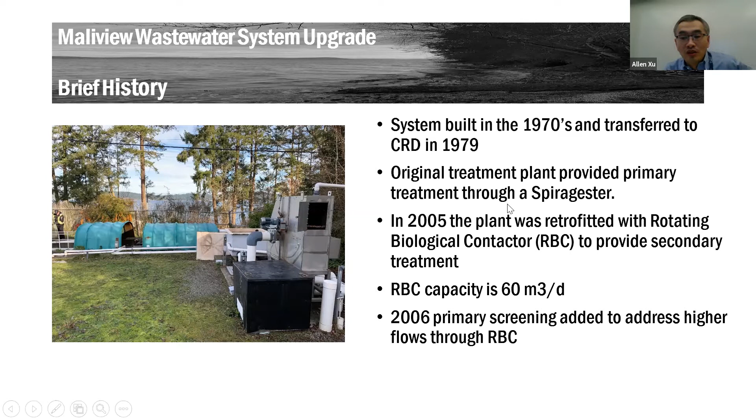So why are we looking at an upgrade for this Maliview wastewater treatment plant? Essentially, we've conducted some study, and it was found that most of the wastewater treatment plant equipment is at or near the end of its life. And there's a few things that we never actually implemented. There's no backup power at this plant, and there's no automated alarm communication system for the plant at the moment. The plant was found to be lacking nitrification capability, and overall it has created difficulty and challenges for us to meet the Municipal Wastewater Regulation as well as Federal Fisheries Act requirements.

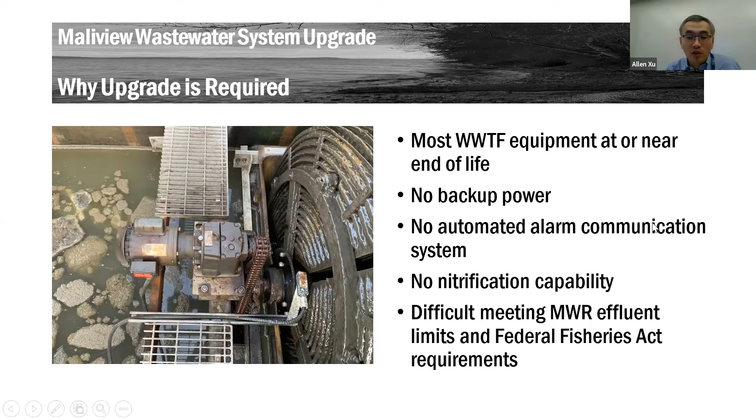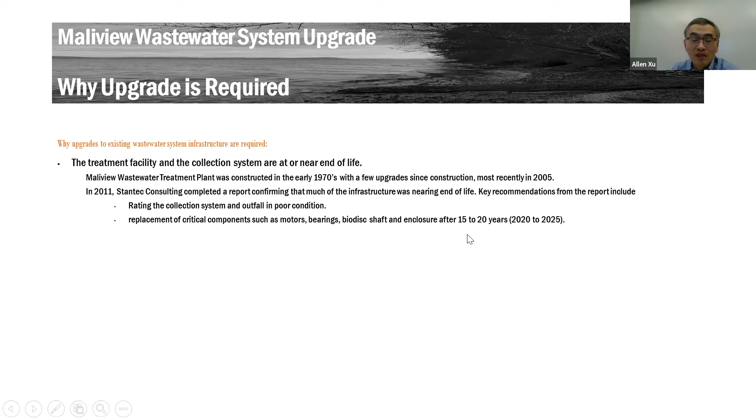So as I alluded to in the previous slide, in 2011, Stantec Consulting completed a report which rated the collection system and outfall in poor condition, and they recommended that critical components such as motors, bearings, biodisc shaft, and the enclosure be replaced after 15 to 20 years. That'll put the replacement starting from 2020 to about 2025.

So here's just an example of what we encountered in terms of operational challenges because of lack of backup power. Last December, there was a snowstorm and the power was out at this plant. Unfortunately, the pump isn't going to be functional without electricity, so the sewage was not able to be treated during the power outage. CRD did respond to this fairly quickly and addressed it within hours. However, we did have to file an environmental incident report as a result.

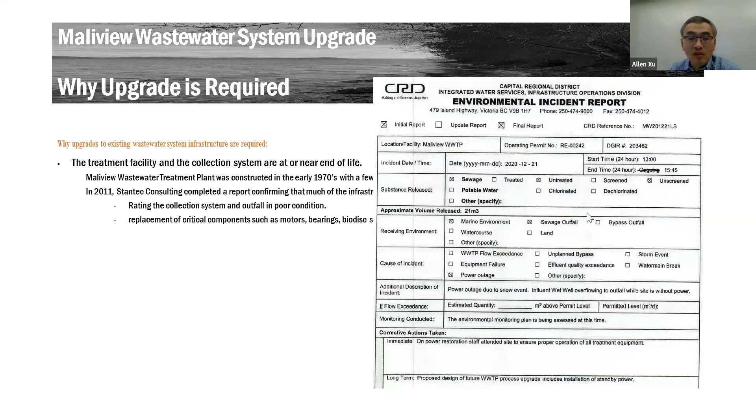So another example to give you is, last September we had to replace the failed gear drive for the RBC unit. We identified the problem at 7:05, and the unit was replaced that same afternoon. But because of the failure of that critical mechanical equipment, a small amount of treated sewage was released to the ocean, and we did have to file another incident report.

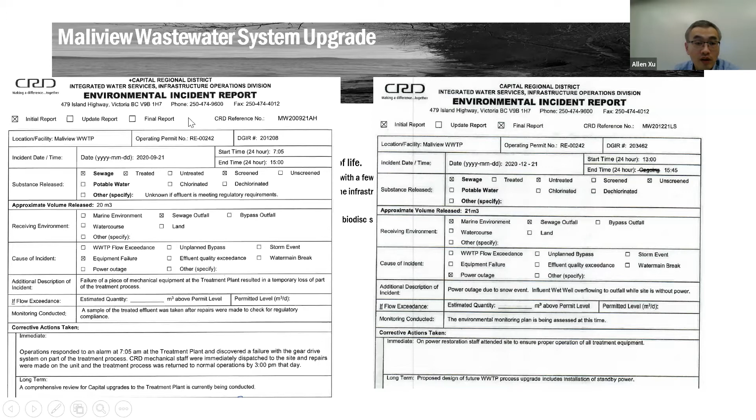So here's just a similar example where, within about a month of the last power outage, two additional power outages occurred, this time due to a windstorm event, and the pump was not functional, and as a result, a small amount of sewage was released, and we had to file another report.

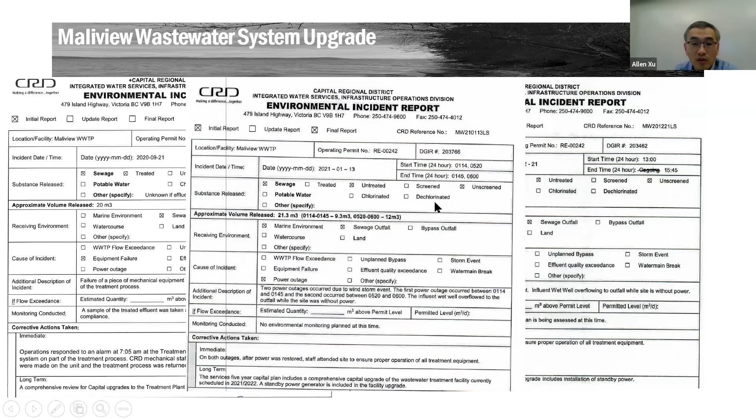Back in about 2018, CRD commissioned a contractor who pushed some CCTV cameras down the collection pipe. It identified numerous tree intrusions and gushers. As you can see from the right-hand side photo, there's a hole and the groundwater is filling into the pipe, and the left photo gives you an example of where, at the joint of the pipe, there's a significant tree roots intrusion into the pipe.

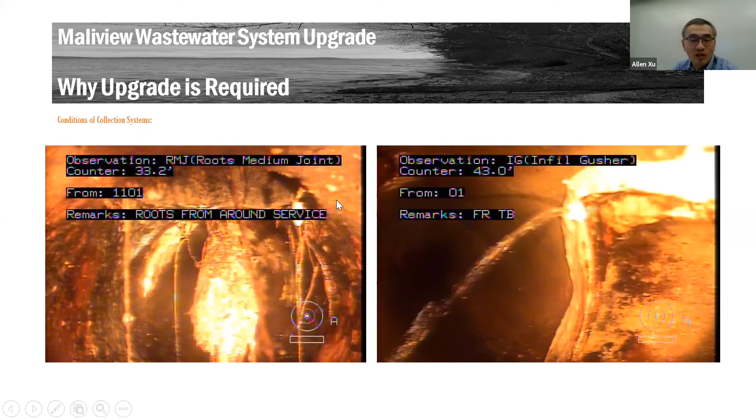I do have to say, this particular upgrading project is not focusing on the collection system repair. The primary purpose for this upgrade is solely upgrading the wastewater treatment plant itself. I'll talk a bit later, when we discuss the cost estimate, about what the scope of that project is.

So besides the aging and failing infrastructure, we had difficulties meeting both provincial and federal regulatory requirements. We had low flows occurring during drier months, which leads to concentrated influent and excessive loads to the wastewater treatment plant, and as a result, relatively poor performance. And during winter months, where the high flow occurs, we occasionally have excessive flows exceeding the provincial requirements prescribed to us in the permit.

The Fisheries Act prohibits deposition of deleterious materials in water frequented by fish. During a recent inspection, sampling and testing showed that the effluent from the Maliview wastewater treatment plant failed the toxicity testing. It was found that the concentration is almost 150% higher than the allowed thresholds.

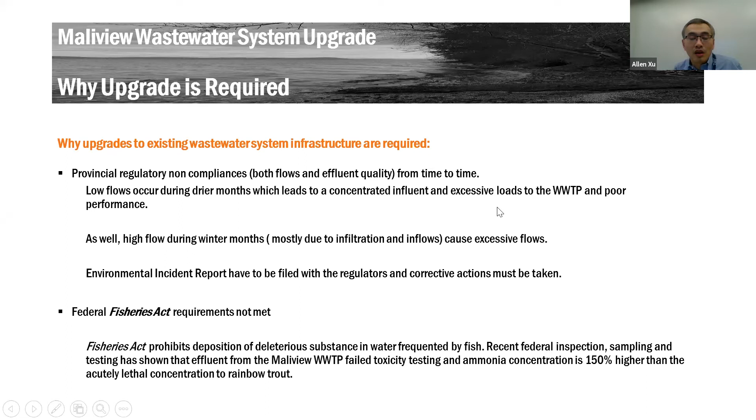So here's a flow diagram that shows you what the current facility and process look like. Essentially you have the sewage being collected through the collection system, which goes through the receiving box. Previously there was a grinder; now it has been removed. Then the sewage goes through the wet well, then is pumped through a 2 millimeter roto screen. Some of it generates waste, which is hauled to a different place. Then the liquid stream goes through a settling chamber, further down to a splitter box.

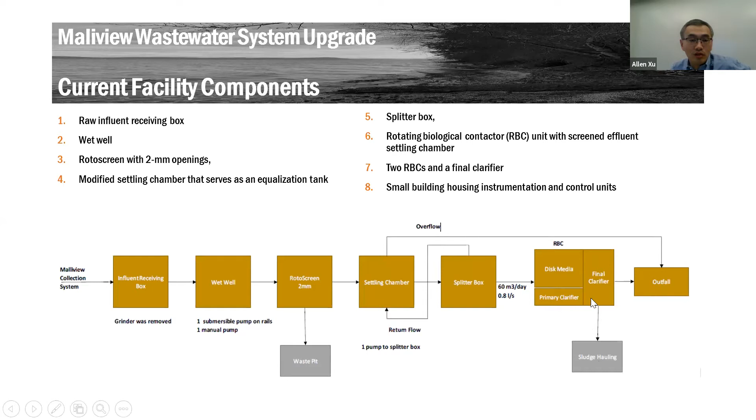Flows that are below 60 cubic meters a day get fed into the RBC unit for further secondary biological treatment. The treated effluent meeting regulatory requirements is released to the outfall and then to the ocean. The process does generate some sludge, which is hauled offsite. For Salt Spring Island, it's going to be Burgoyne.

Here are a few photos to give you a bit of a picture of what the current plant looks like. The first one is the storage building, where the instrumentation and some operational equipment are stored. The top right one shows you that green enclosure is where the RBC unit is housed. That's the RBC unit, and here is the splitter box and the screen.

The third picture shows you what it looks like inside the RBC unit. This is the RBC disc, where you can see some biological film has accumulated, and that's how the biological process happens and the wastewater gets treated. And the last picture shows you what the existing clarifier looks like.

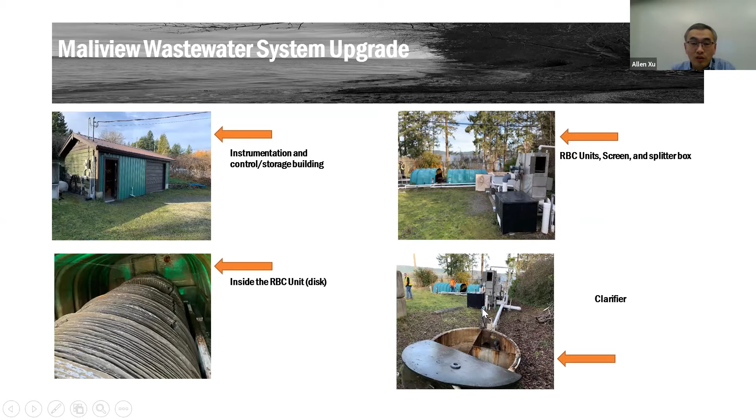The Maliview wastewater treatment plant is primarily registered under the provincial regulation, the Municipal Wastewater Regulation. It requires the wastewater treatment plant to treat the wastewater to meet total suspended solids, biochemical oxygen demand, as well as pH parameters prescribed by the regulation. It also requires us not to discharge toxic effluent to the receiving environment.

Because of the small plant discharge, which is smaller than 100 cubic meters, this wastewater treatment plant is exempted from the federal Wastewater Systems Effluent Regulations. However, the Fisheries Act still applies, which requires that the discharge to fish-bearing waters cannot be toxic.

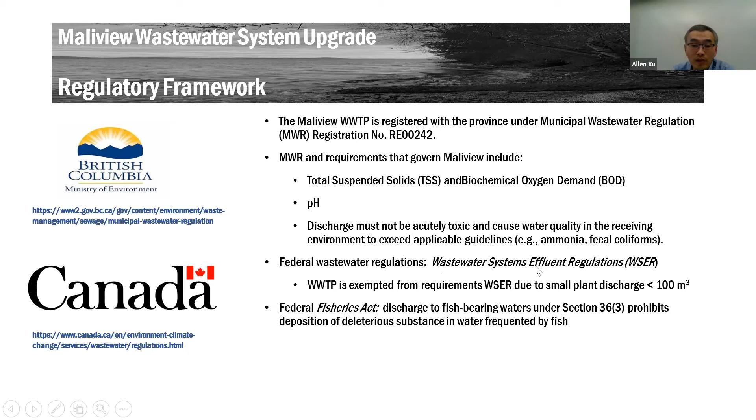So how have we been doing in the last few years in terms of the treated effluent as well as toxicity? We have collected and analyzed the data from 2016 to 2019. This graph shows you the red line, which delineates the threshold the regulation requires us to meet; above it is not meeting the requirements. As you can see, the average and maximum combined flows from time to time exceed that requirement, mostly during winter time, when there's significant precipitation and significant infiltration and inflow into the collection system.

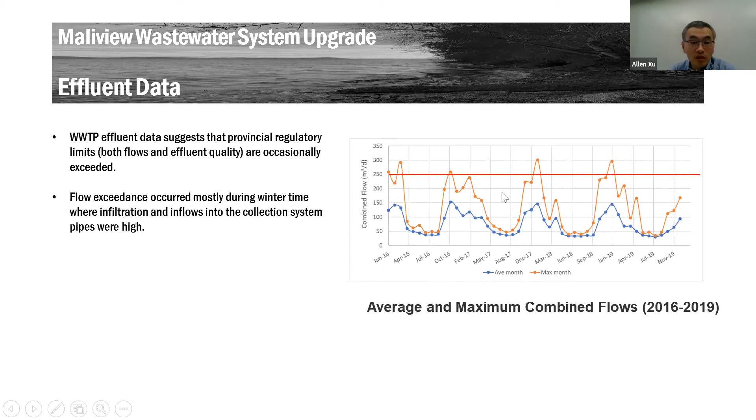Here's the data in a graph for the effluent CBOD and TSS concentration. The yellow line delineates the threshold that the regulation requires us to meet, which is 45 milligrams per liter. Again, from time to time, mostly during drier months where the organic loadings are high, the plant has difficulty meeting the effluent quality requirements in terms of CBOD and TSS.

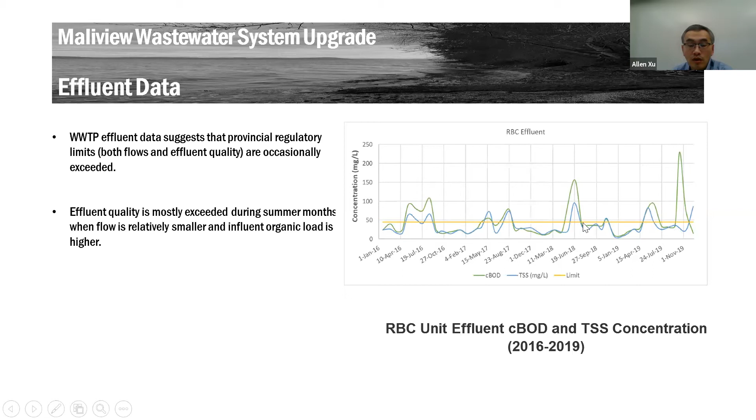In terms of the toxicity of the effluent, unfortunately, from time to time it can reach a significantly higher level than what's desired by the regulation. One time when it was tested, it was significantly higher, almost 3 times what the regulation dictates. To minimize the potential for acute toxicity, the wastewater treatment plant upgrade is therefore urgently required so that we can bring the wastewater treatment plant back into compliance.

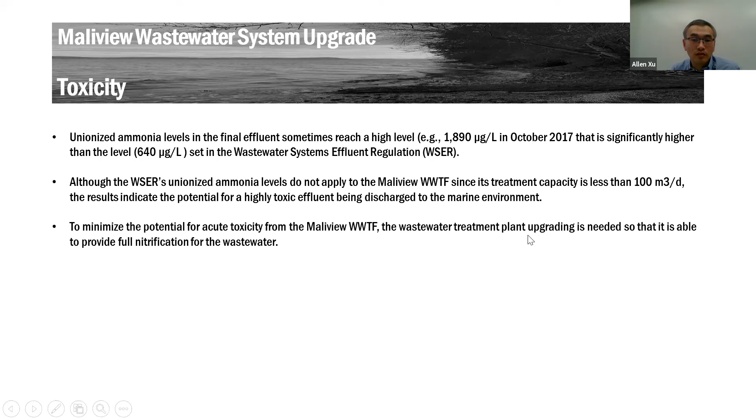So the regulator has been monitoring the performance of this plant on a regular basis. They conduct site visits on a regular basis. In August of 2019, Environment Canada inspected this particular site. They collected effluent samples for toxicity testing. And again, unfortunately, the sample failed both testing, and the result was almost 1.5 times greater than the allowed concentration.

So a month after, Environment Canada issued us a warning letter. They have classified this as the wastewater treatment plant contravening subsection 36(3) of the Fisheries Act, and they require the CRD to take all necessary corrective actions to ensure compliance. They have also warned us, if we don't take further actions timely, they may consider imposing financial penalties, orders, injunctions, or the highest level might be a prosecution.

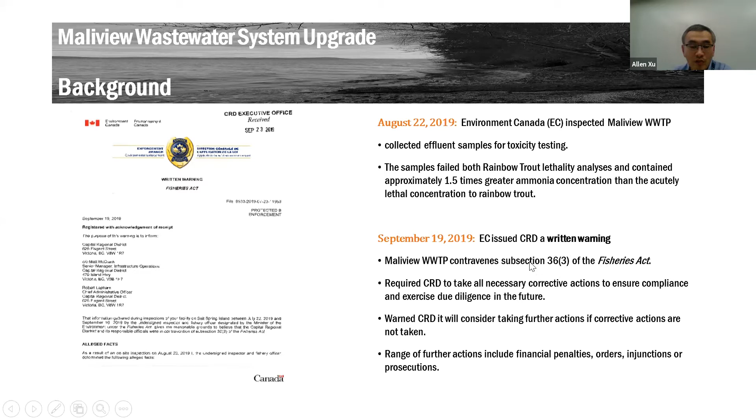The CRD takes those kinds of non-compliance very seriously. We have assembled a team, and we have provided a written response back to Environment Canada. In that letter, we outlined 3 phases of corrective action with a concrete plan to enhance the facility and bring the facility back to regulatory compliance. So we had 3 phases of action plans.

The short-term plan was to implement operational optimizations. Things like increasing sludge hauling frequency do have a bit of positive impact on the effluent quality. That, along with other operational optimizations, has been fairly promptly implemented during 2019 and early 2020. And the medium-term action plan involves conducting an engineering study and carrying out a conceptual preliminary design for the upgrading of the wastewater treatment plant. We have just completed that plan, and we're going to talk about it later in the future slides.

And the final phase, which is aiming at the longer term, is we are committed to the regulator to implement the actual construction of the wastewater treatment plant by the end of 2022, hoping that with the successful implementation of the upgrading, the effluent quality is going to be brought back to compliance.

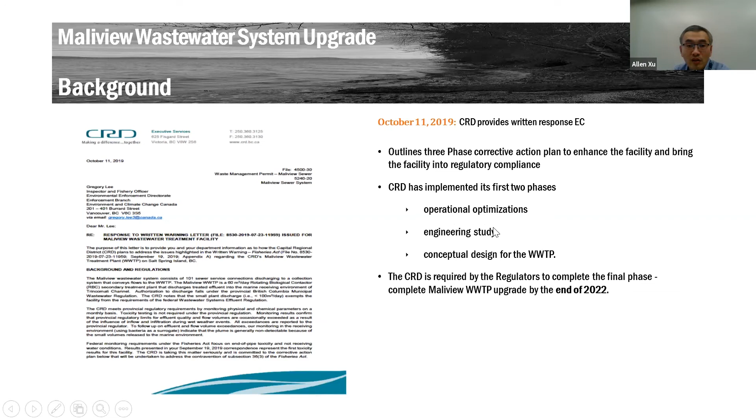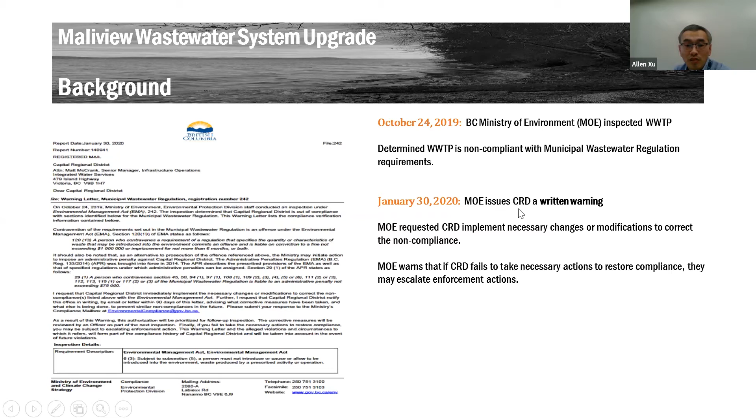So similarly, the Ministry of Environment of the BC province also inspected us and issued a written warning letter as well, pretty much at the same time, where they discovered that there's potential non-compliance at that site. And we again provided an action plan back to the regulator, and essentially we're committed to the same thing: implementing the 3 phases of action plans and bringing the wastewater treatment plant effluent quality back to compliance.

So with that, I'm going to pass it over to Jose to talk about how Associated Engineering evaluated different types of technologies, what criteria we used, and how we reached the chosen technology, which was the MBBR technology. Thank you, Allen. So yeah, Associated Engineering was retained by the CRD to conduct a feasibility study of the upgrades to the Maliview plant and come up with a conceptual design.

So we basically looked at 2 options in the first part of the study. We looked at advanced primary treatment, just seeing if improving the screening could relieve the issues the CRD was having in terms of compliance with the Municipal Wastewater Regulations and the Environment Canada Fisheries Act. So we looked at 3 technologies: disk filtration, a rotating belt filter, and an organic harvester. The problem with those technologies is that they would not be able to address the main issue, which is the ammonia toxicity, because the ammonia is soluble, so they would not be able to remove it, and there's going to be a risk of toxicity in the final effluent.

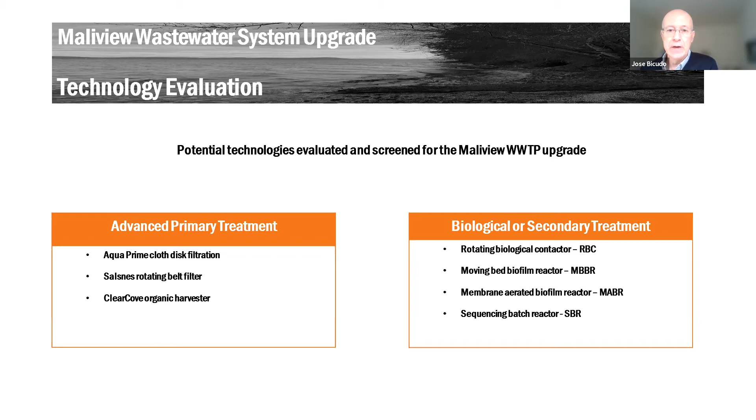We then looked at a number of criteria. If you could move on. So we looked at the technology maturity and the size of equipment. It's a constrained site, so we want to make sure everything would fit into the required footprint. We looked at the ease of operation and maintenance because it's not a facility that's manned 24 hours a day. And ways to improve effluent quality, especially the ammonia, which is one of the main issues.

So when we looked at those criteria, we ranked those 4 secondary treatment technologies, and we shortlisted 2 on which we then conducted a more thorough evaluation. The 2 were the moving bed biofilm reactor and the conventional activated sludge. We then did a triple bottom line type of evaluation, looking at technical, environmental, capital, and maintenance costs.

And we then basically did a conceptual design for each of those 2 options. The MBBR option scored higher, and the reasons that it scored higher, it was that it has a technical advantage to be more resilient to variation in flow and influent loading, which is fairly high at Maliview, or can be high at Maliview, because of the dry weather you get in the summer and then the wet weather in the winter and early spring. It has a smaller footprint than the conventional activated sludge. It requires less maintenance and operational care and less capital costs.

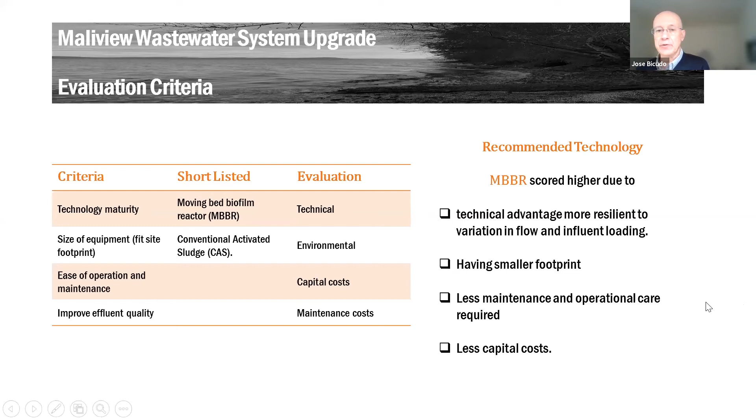So we moved on then to do a conceptual design for the MBBR. And the idea was to try to use as much as we could the current infrastructure that is available on site. So we're basically keeping the influent receiving, the wet well, the screen, and the settling equalization basin. And even the RBC, the infrastructure is going to be kept in place. We're just going to repurpose it. So we're going to add 2 tanks or 3 tanks.

One stage for the MBBR is going to be removing the organic material, so the BOD. The second one will do the nitrification, where you convert the ammonia to nitrate. And then we're going to need to separate the solids that are generated in this process. So we're going to use a coagulation flocculation tank, add the coagulant to help join all the solids together, and then use a clarifier, which is the RBC tank repurposed to a clarifier, to settle those solids. The clarified effluent is going to go through the outfall, and the sludge is going to settle in the bottom, and it's going to be removed periodically and moved to another plant.

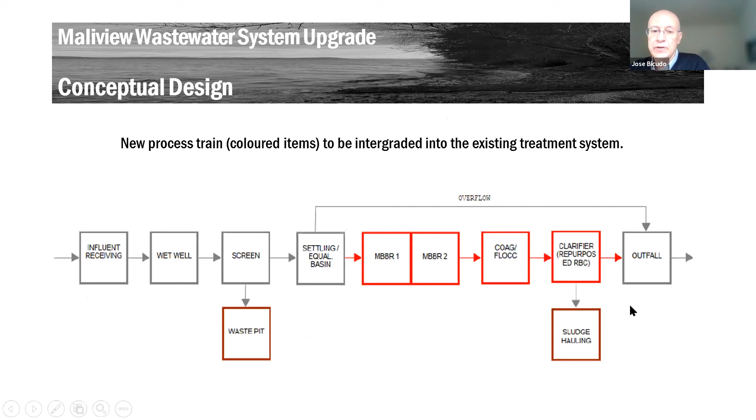So this is a layout of how things are going to look on site. On the top, you have the existing RBC, which we're going to keep that infrastructure of the tank and repurpose to a clarifier. The screens just on the right over there are going to be kept, and we're going to reuse them, along with a clarifier that's not shown well there, but it's just below that screen. Then it goes to those 2 MBBR tanks, 1 and 2.

There's going to be blowers inside the building that are going to push air that is required for the microorganisms to convert the organic material. And then the contents of the tank will go to this coagulation flocculation tank, where a coagulant will be added to help with the settling, and then it settles, and then it goes through the outfall back to the final discharge.

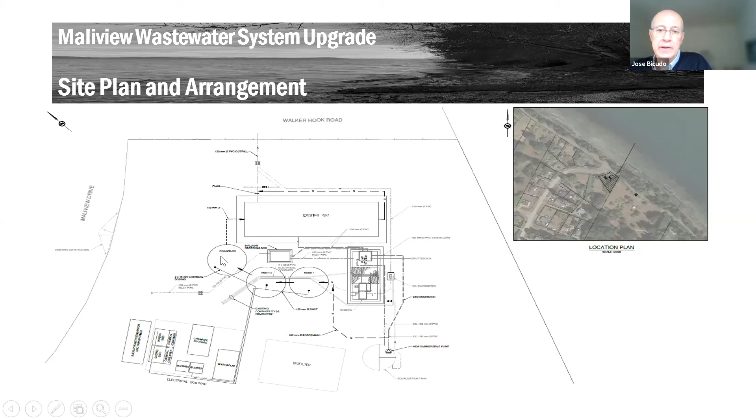So the 40% contingency is allowed because the phase we're at is still conceptual preliminary design. We are still trying to understand, as we proceed further with the detailed design, as we conduct the geotechnical investigation, the underground conditions at this site. And furthermore, we have initiated some conversations with the regulator. At this stage, we do not yet understand what the detailed regulatory requirements are going to be, and any additional requirements that may be required on top of the conceptual preliminary design that we have conducted.

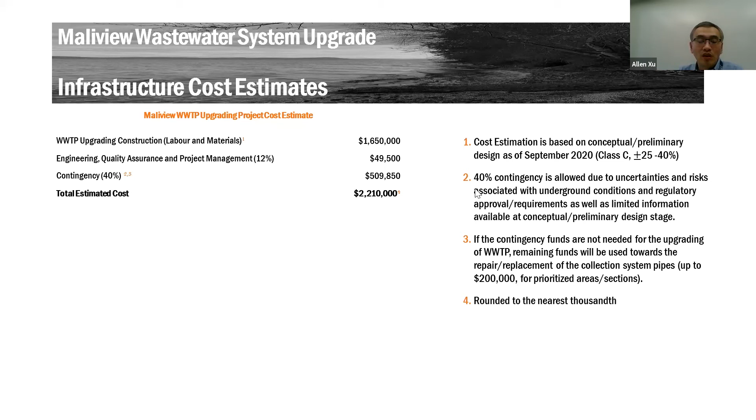So CRD is always on the lookout, and we have submitted a grant application to the Investing in Canada Infrastructure Program last October, and this plant upgrade is eligible under the green infrastructure category, which requires that the project can result in a wastewater effluent that meets the wastewater regulations or provincial regulations where there's a federal equivalency.

So if we're successful in this grant, the province is going to provide up to 40% combined with a federal contribution of up to 50%. So the 2 levels of government are going to provide up to 90%. The ratepayers of Maliview and the CRD, essentially, need to cover the 10% and any overrun that may occur.

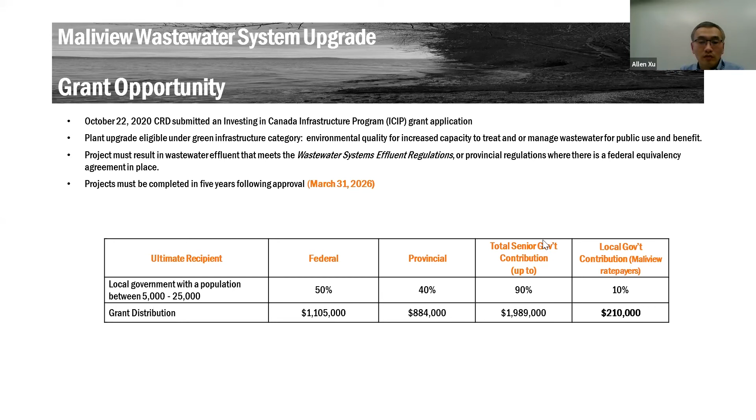Okay, can everybody hear me okay? I just lost my speaker phones.

Yeah. Okay. So this is the funding implications that we'll speak to in this slide here. The debt to be funded will be shared with approximately 94 properties within the service area. As part of the submission requirements for the grant, the CRD had to identify their share of the cost, and they created a loan authorization bylaw 4370, and gave it third reading on November 18th of 2020 to borrow the $2.21 million.

The grant is not guaranteed. It is a very, very competitive process. You're competing with a lot of other municipalities for their infrastructure requirements. If the grant is not awarded, the capital upgrade is still required, as outlined above from the orders and warning letters that we have gotten from the federal and provincial government.

The grant required a secured funding plan to cover all the eligible costs of the project, plus any cost overruns beyond the budget contingencies and ongoing operational costs associated with the project. That is why we had to submit a loan authorization bylaw to borrow the full amount, and it was given third reading. That was part of the requirement of the grant.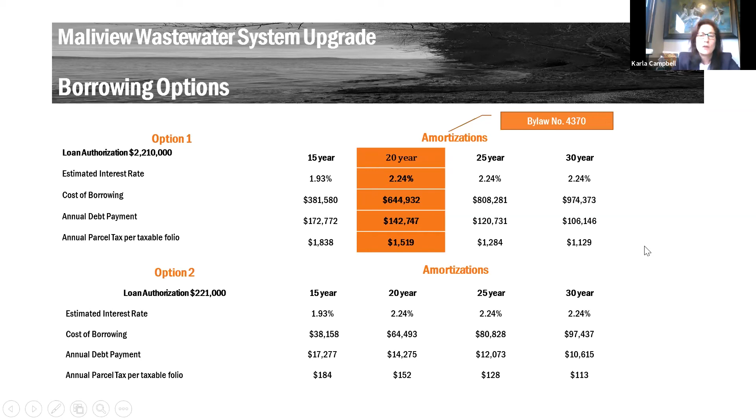These are 2 options by which we can go out to obtain your consent to borrowing. And we have a survey at the end of this and on our website that we're asking the ratepayers to fill out to give us an indication of what option they would prefer to have their consent taken. The first option is called an alternative approval process. Some of you may be familiar with it as a counter petition. It was the old term.

What it means is there's a question, and if you are against the borrowing proposition, all you need to do is sign it and bring it into the office. And if 10% of the ratepayers in that service area are against the borrowing question, the borrowing is quashed. The cost to run something like this is about $20,000. It's mostly due to advertising that we're legally obligated to put into the local papers.

And then there's a second option. It's a full referendum with a ballot box. You have to hire poll workers, an election officer, and have ballot boxes. And it is about $60,000 to run because of those labor costs. So these are 2 options that the community can consider about how they would like to give their consent, or if they'd like to object to it. There's two ways to go about it. And of course, the ratepayers of Maliview are required to pay for either one of these options, whichever becomes the preferred choice. The cost of holding that voting option will be borne by the ratepayers.

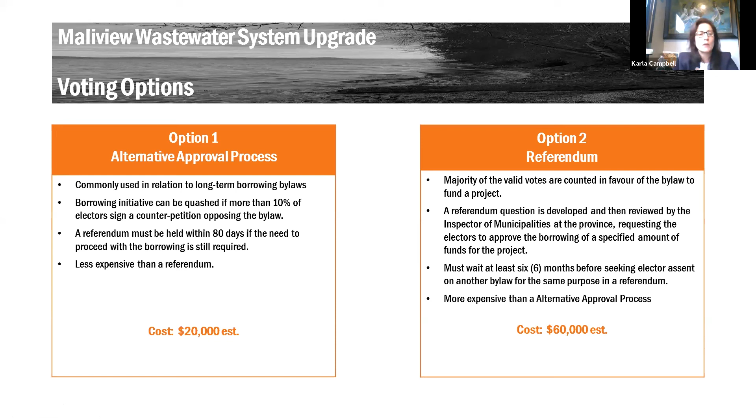Next slide. So we're here at the end of our presentation. We've got a few questions in the Q&A, and also we're open to having any chats as well.

So the first question we have here, can ratepayers choose a shorter amortization term if the grant is received? It would save a lot over 5 years. Yes, part of that feedback form, we're asking the ratepayers to give an indication of what amortization period they would prefer and which borrowing option they would like, as well as how they would like to vote. So that's all available to the ratepayers to give us their feedback.

We're going to take all of those surveys and roll it up into a report back to the commission so that they can make a decision on the way forward to obtaining consent and what borrowing amounts the community is accepting. I hope that answers your question. Are there any other questions?